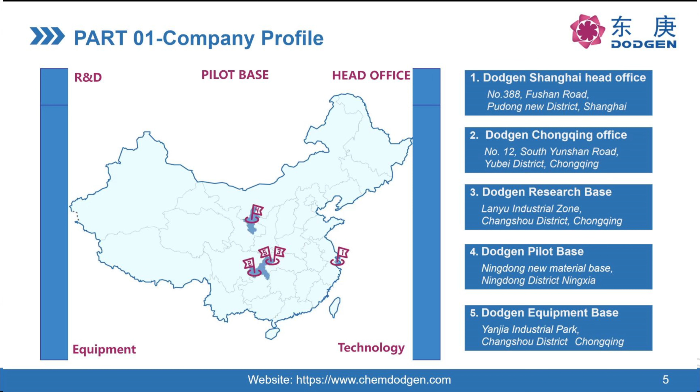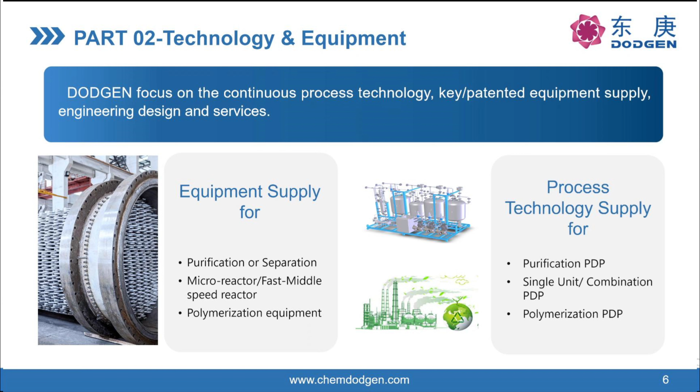Part 2, I will introduce our technology and equipment. We focus on process technology and supply the key equipment suitable for our technology. Mainly, we are involved in technology of purification, separation, faster speed reaction, and also polymerization.

For the degradable plastics, PLA is a bio-based technology, and we have already cooperated with the biggest supplier in China. The capacity has reached 13,000 tons per year.

For plastic recycling, we are cooperating with an international company in Korea to recycle DMT, the monomer of PET. This is the recycle of existing plastics.

For electronic chemicals, we are doing technology of electrolyte in lithium battery systems. We usually handle high purity additives and solvents, the synthesis part, and also the purification part. This is already at the industry stage.

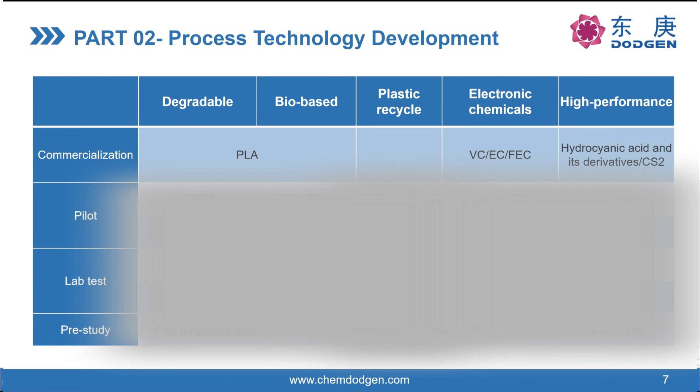I will recommend some technology I think is suitable for Southeast Asia. The first one is the solvents and additives technology for electrolyte, including VC, EC, FEC synthesis and purification technology.

We already cooperate with almost all relevant leading enterprises in China. We hold about 17% of the VC market, and we supply this technology to clients.

For hydrocyanic acid and sodium cyanide technology, we usually provide an updated, advanced hydrocyanic acid technology. This is the most advanced technology in the world, with the lowest raw material and utility consumption. We also supply key equipment like the reactor and the most important internal parts.

We supply key parts of the purification and separation section, and we've been involved in capacities ranging from 4,000 tons per year to 60,000 tons per year. We are the biggest supplier of this technology in China.

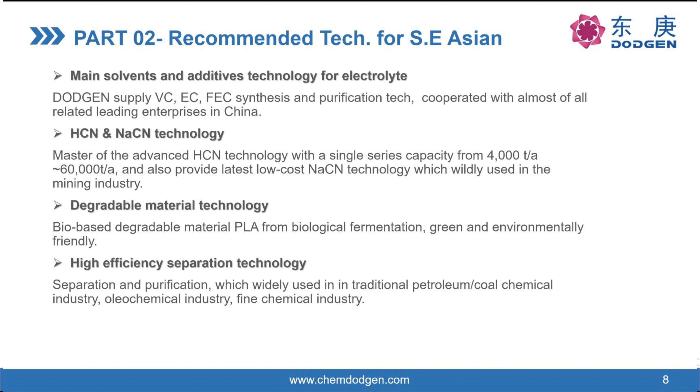We also have high efficiency separation technology. Separation and purification reaction equipment is very widely used in the traditional petroleum or coal industry, as well as in the oleochemical industry and fine chemical industry.

Later, I will show our equipment in the separation technologies. First, I will introduce the equipment we were involved in for separation technology. For evaporation technology, we have the falling film, wiped film, and short path evaporator.

In distillation technology, we can design and perform hydraulic calculations, and also supply key internal parts of the column, like trays, structured packing, and random packing. For liquid extraction, we have static tower and rotating disc contactors.

For melt crystallization, this is one of the equipment lines we supply that is top in the Chinese market. For different capacities and systems, we have the falling film crystallizer and the static melt crystallizer.

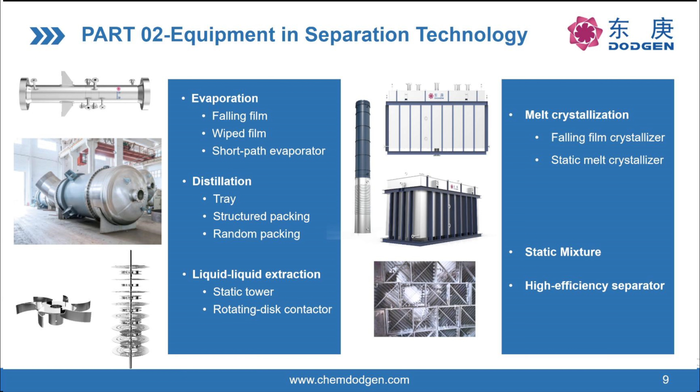This is especially good for high purity chemical requirements. We also supply static mixers and high efficiency separators.

This page shows the internals for the design of distillation columns. We have all different kinds of internals, packing, random, distribution, and collection components. We provide a good, total solution for the client to ensure more capacity, better quality, less consumption, and greater benefits to customers.

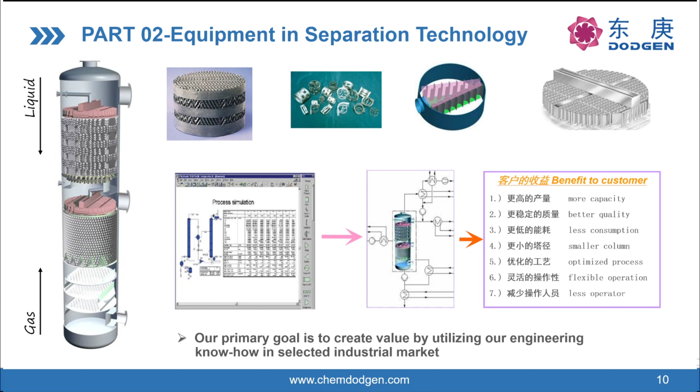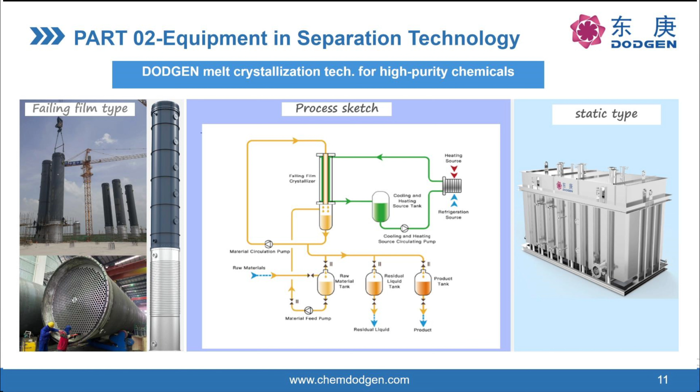On the left and right are different types of melt crystallizers. We use this technology in extraction technology, in degradable materials, in polymer purification, in monomer purification, and also in traditional chemical industry and fine chemical applications.

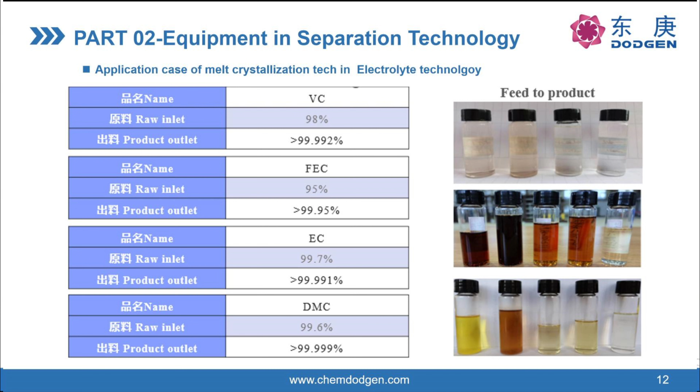The color is changed very obviously. And some monomers, during the purification of some monomers or polymers, especially for recycle systems, you need to remove the dyes. So crystallization technology is suitable for that.

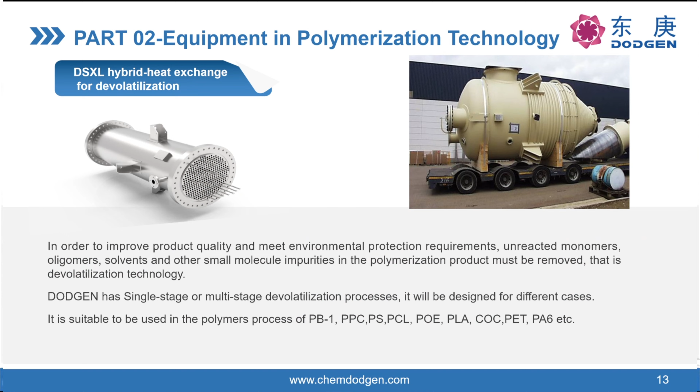Next, I will introduce some equipment in the polymerization technology. The first is a very hybrid heat exchanger for devolatilization. In the polymerization industry, you usually need to remove solvents and other small molecular impurities like unreacted monomers, polymers, oligomers and solvents. This is static equipment. Instead of the rotating equipment, it can save a lot of power. We also have different designs of multi-stage or single-stage processes, suitable for polymer processes like PB, PPC, PS, POE, COC, PET, and so on.

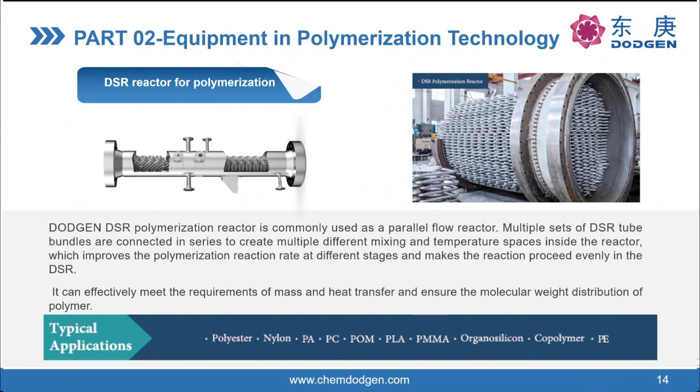Another equipment we use in polymerization is the DSR reactor. It is commonly used as a parallel flow reactor, but inside the shell it has a lot of piping with a larger surface to remove the heat of reaction. This means it can get very uniform temperature in the reactor, and it can make the reaction get a molecular weight distribution that is sharply run. So it means you will get good performance quality of the polymer. We already used this in PA, PC, POM, PLA, PMMA, and so on.

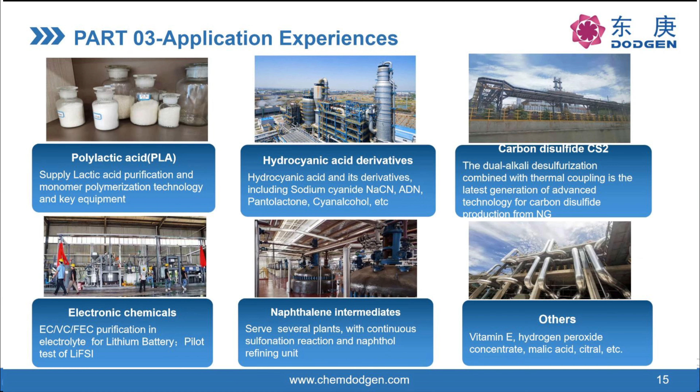Part 3, we will introduce our business scope and what we can do to spread to clients. We have the R&D center, so we can do the lab test for the client, the pilot test for the client. Especially we have mounted skidded units, like distillation, crystallization, microreaction, and devolatilization skids that can be used to do the pilot test for the client, and also for new product research and developing new processes.

For the design, we do feasibility studies, and for the process, PDP or BEP, basic engineering design for the client, and participate in some parts of the DEP design. For the manufacturer, we can supply the equipment to the client, especially the key parts of the equipment, and the internals of the columns were manufactured by ourselves in our factory. And also for the skid mounted system assembly.

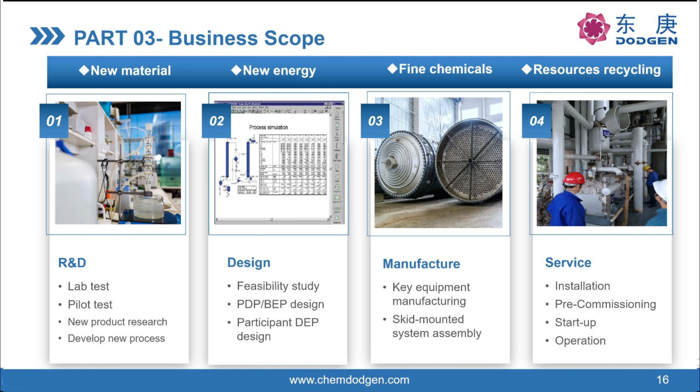For the service, we supply the equipment to the client together with the service of installation guidance, pre-commissioning, commissioning, startup, and to do the optimization of the operation.

We are active in the traditional chemical industry, synthesis biomaterials, biodegradable plastics, and recycling. Electronic chemicals like electrolytes, solvents, and additives, and also involved in the new energy field, providing customers with advanced, reliable, competitive process technology, unit equipment, and high-quality service.